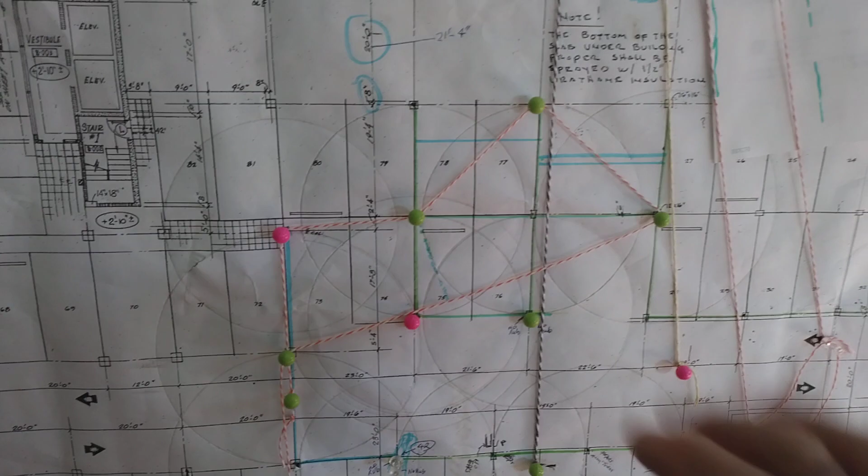Okay, let's look at it on the drawings now, the triangle array. And you can see the position, how it's not square. Looks like that, right? It looks like that, and that's where the parking is. So let's go to the wall, since that seems to be a favorite discussion of some people. Here's our wall.

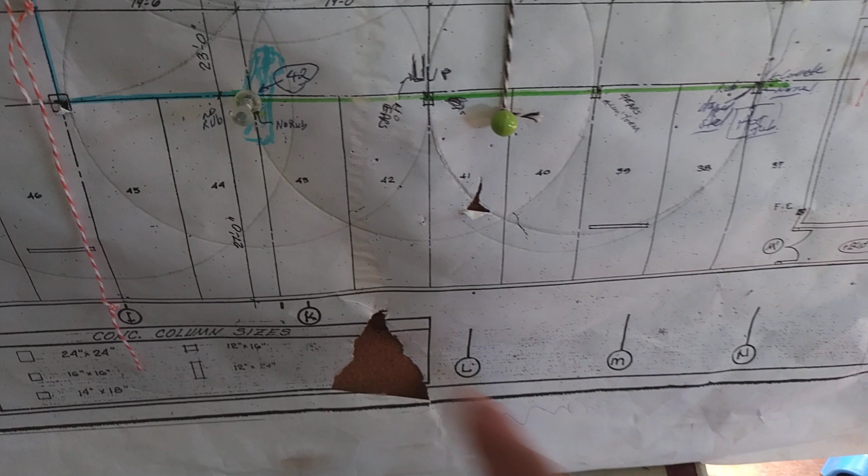Over to the pool. This acts like an infinite non-deflecting surface, this wall system with a ledger into it. So I don't treat it as a column. Of course, you can have shear across it, but I don't treat it as a column, so that it's no deflection. I don't treat it as a beam. So columns, of course, can buckle. They can punch through also. They have their shearing. Let's just look at it in one of the formulas.

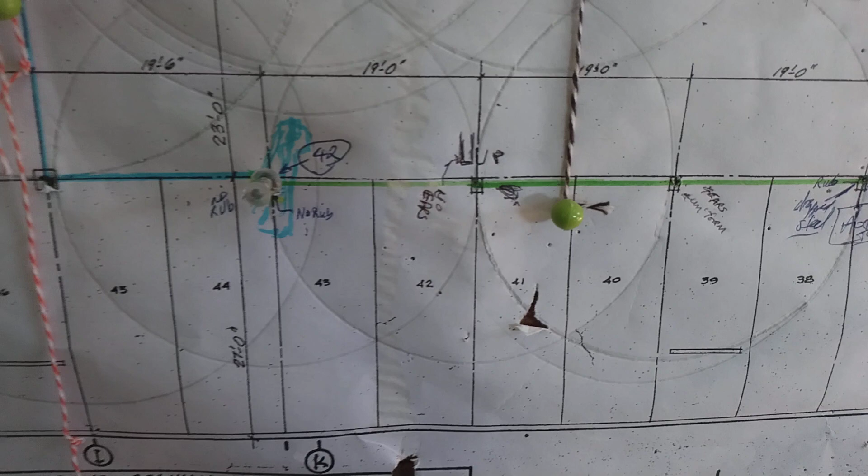It's a 2-to-1 ratio, pretty much, that you max out. And the width of this is 19 feet. 19 feet, 19 feet, 19 feet. So it's symmetrical thereabouts, the garage area. Here, here, here. I mean, the pool deck area. 19 feet. 19 feet 6. 20 feet. 20 and 20. And so on, 20, and then, well, we're not down in the failure zone anywhere.

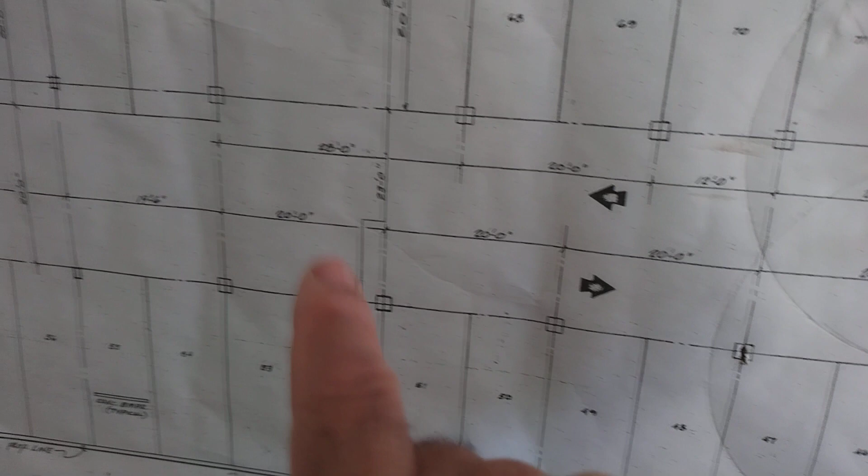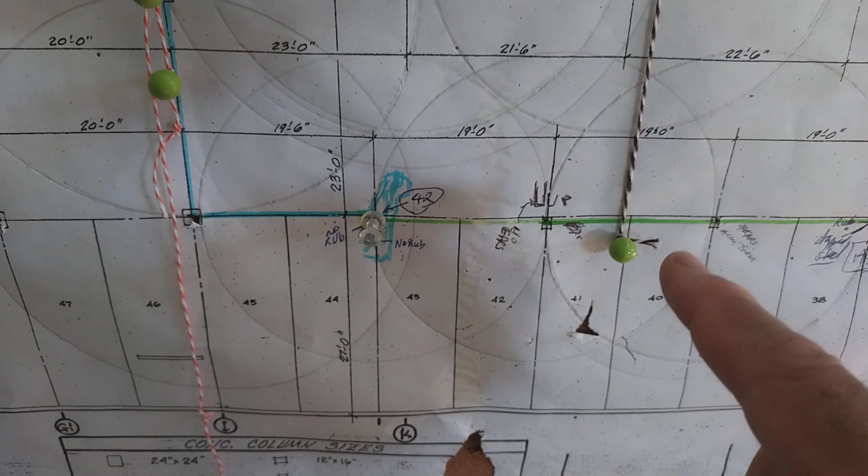We're here. Here's a larger 20. Here's a 19. These are the larger columns here. The larger columns are here, rather, correction. Larger columns are here. I'm looking through a camera to try to do this for you. And so they have more protection because they have more surface area. Now, looking at that 2-to-1 ratio, it's 19 feet. So what is the height? What is the distance from here to here?

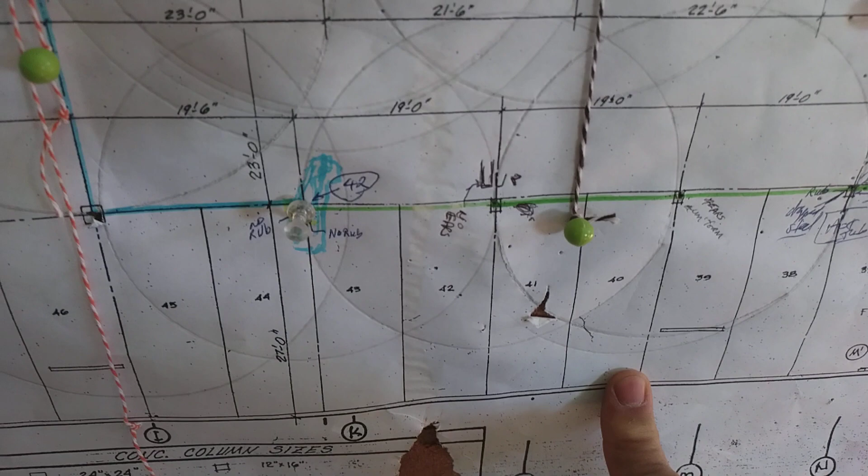It's reported as 27 feet. 27 from here to here. So it meets the requirements. There's 19 by 27. So from this point to this point, back to the entire wall, it meets the requirement of being a two-way slab, dimensions-wise. I know a lot of engineers don't like that dimension rule, but it exists.

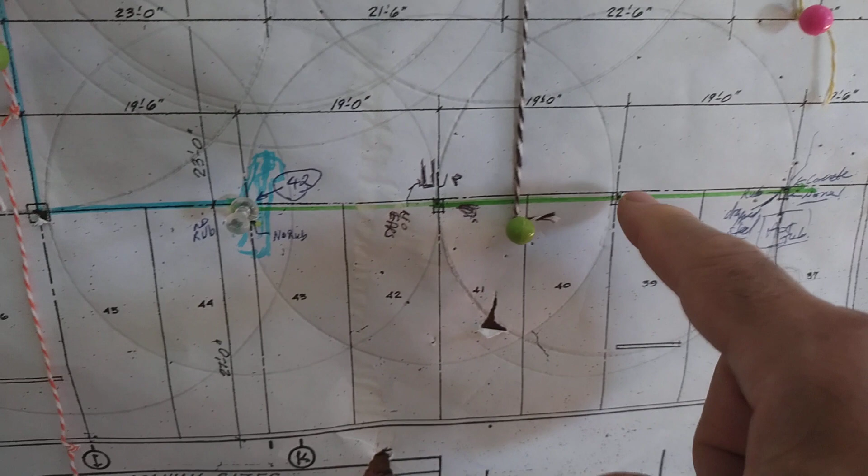So now we need to consider the reinforcement. The main bars at the bottom in tension should also be going multiple directions. The main bars for these spans. So then the thickness of the concrete matters. It will help with deflection, and also punch shearing here. Now I'll give you an idea what that would look like.

So on the crate, this would represent our wall. This represents our main bars. Two-way slab, I'm going to consider them both main bars. And this will be our concrete pad with reinforcement in multiple directions, plywood. Our securement are just going to be the fasteners that I staple through, holding this to the surface. This will be moved around in multiple videos for you based on allowing 10% deviation.

Allowing a 10% deviation from this corner here, considering it's a ledger, even though it's cantilever right now, but from this corner lined up with the column here, just twist it a little bit, no big deal. This is within 10 degrees, that span. And that's the 2-to-1 ratio. This fits for this location to this location, and to this location is less than a 2-to-1 span.

Now, I can use different things to determine degrees. I shall use a digital protractor, if you will, angle finder. And we have another column over here. So these columns are just bricks that I get to move around. So right now I've got them in line with each other, and I have the ledger. And if you take note, right under here, there's a little bit of a gap right here, just a little bit.

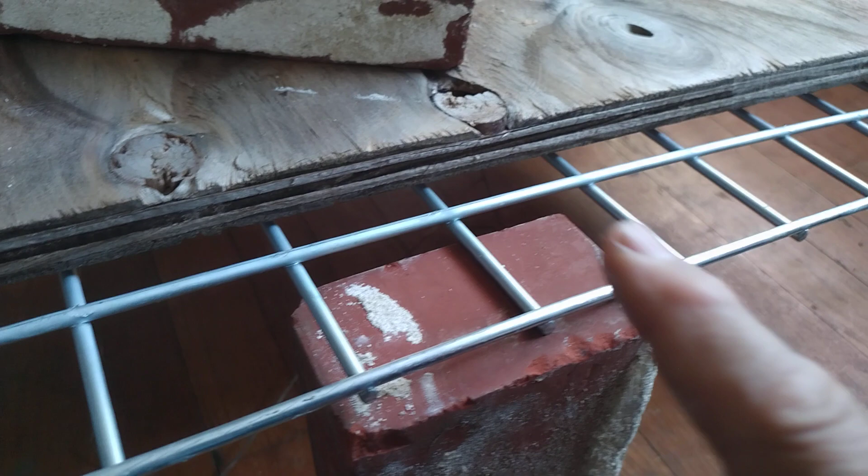So as we look at these two bricks together, at the bottom they're tight, and at the top surface they're gapped. So what happened there? Well, that's what happened there. That little hogging action happened. Deflection up. That would represent itself here at column heads. You would see cracks. Shear heads, you see cracks opening up like that. If this side of the deck is going down, that side's going up.

Planter box being over them, you would not be able to observe them. This is part of the things where people say, well, it lasted 40 years, but it was unobserved pretty much for however long they had the planter boxes on top of them. So this could have been happening.

And here's the interesting part, is that I went through the as-built, if you will, and that's because the engineer hired a surveyor to survey the deck. Surveying the deck, it looks beautiful. It really does. You look on one side to the other side, you may see some quick indicators of a half-inch drop. Overlay that with the drain system, and you say, okay, well, that's going towards the drain. You're just not finding that the deck is indicating itself as much.

But it kind of is, because you're way out here when you all of a sudden see a quarter-inch drop in the deck, but the profiles seem to match going towards drains as I'm profiling it. Still working on that, but the point is, it's a very little bit of a deflection. This little bit of deflection here creates a huge gap at the top. It would be filled at the top. This means you're already having a negative load on each side of your supports.